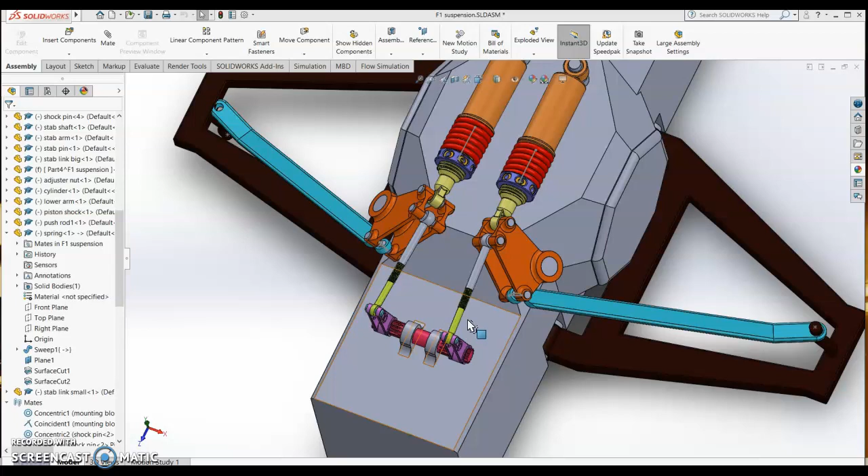On this video, we are going to review the design of the stabilizer link, the threaded link, this stabilizer link. So I open. Alright, so this is the finished product of the stabilizer link. It got a thread, and then of course it got a ball socket inside.

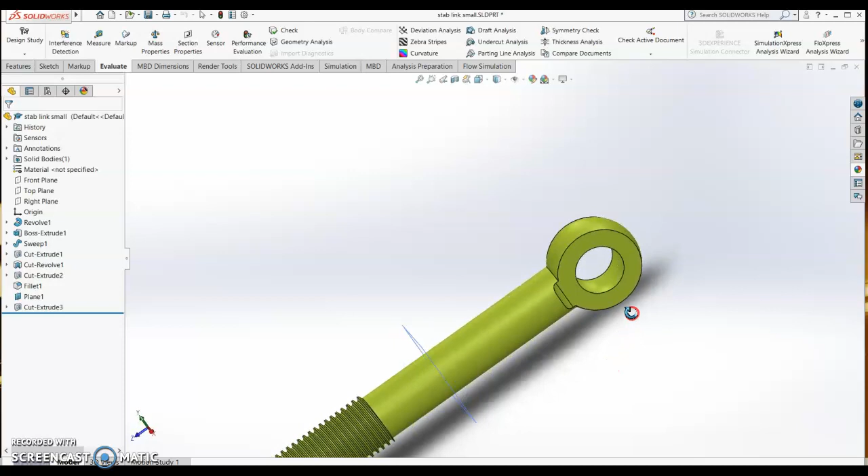Alright, so let's see the first sketch. So the first sketch is a ball, similar to the big stabilizer link. Edit sketch, normal to. So we drew a circle with a 15 mm diameter and then drew a line to make it half. So that is the sketch.

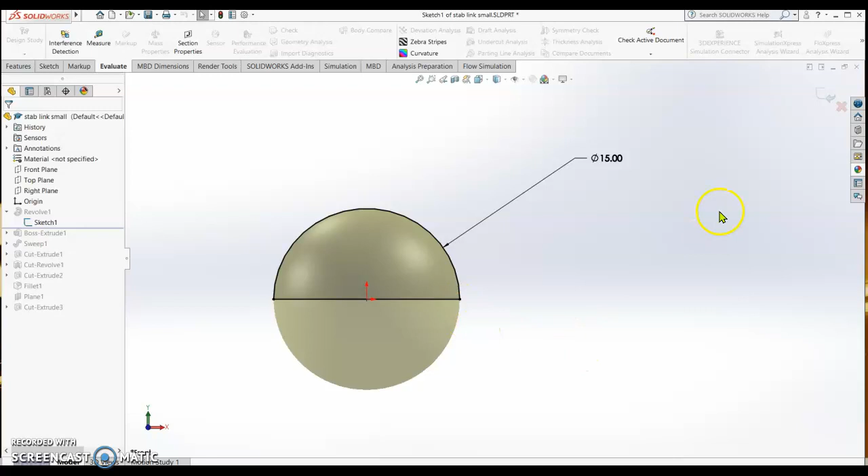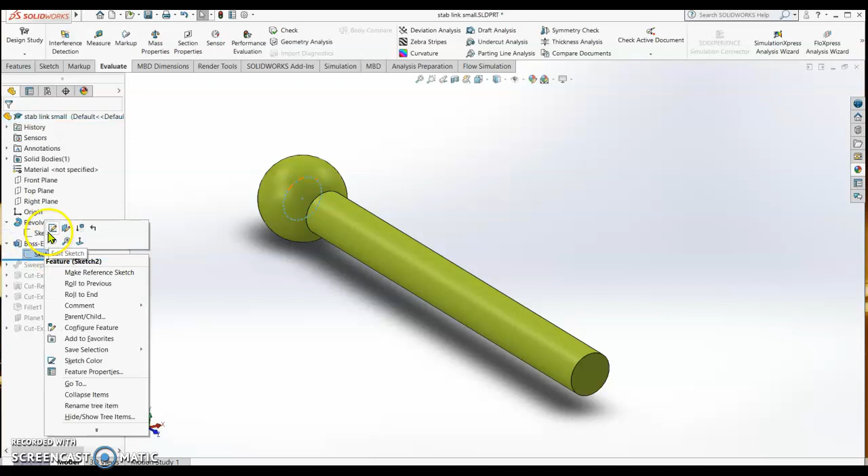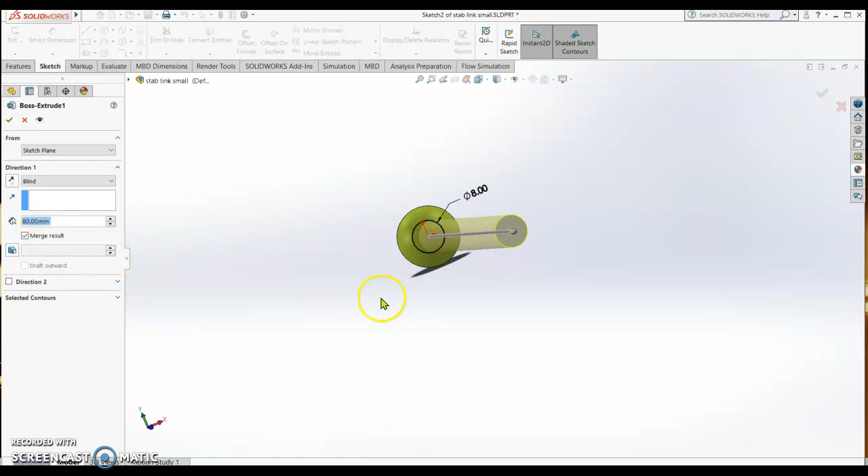We close the sketch, and then of course it is revolved, using this line as the axis of rotation. Then check, then extrude boss for the rod. The sketch is on the origin, on the front plane, center of origin, 8 mm diameter for the rod. It is extruded to 80 mm, so the length from the origin to this point is 80 mm.

After that, he makes a sweep feature, used in making the thread. So how is this design similar to the big stab link?

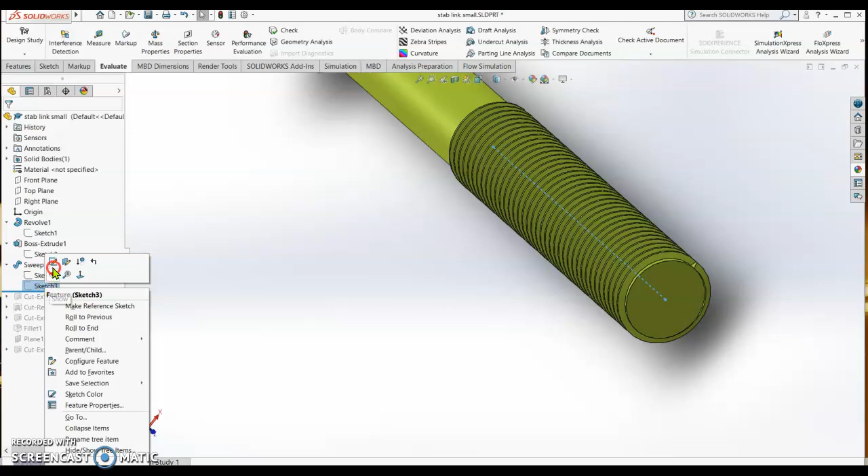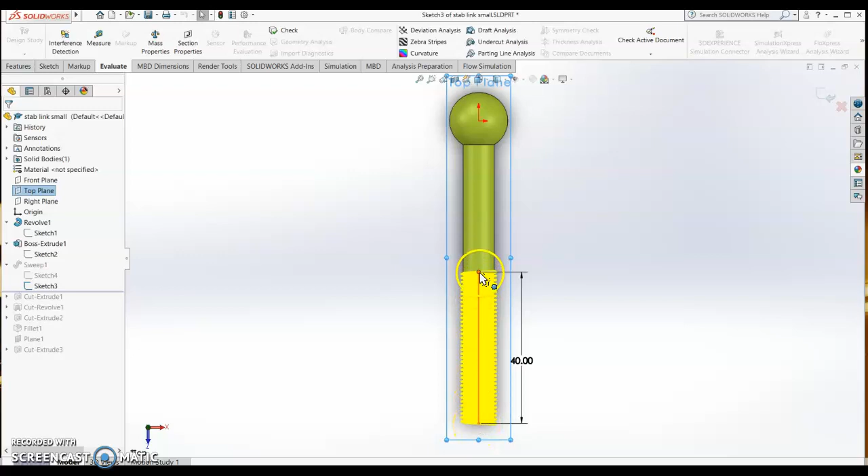Edit sketch. So the first sketch is a line on the top plane, normal to, so it's one line. The length is 40 mm from the edge of the shaft or rod going inside, 40 mm. Close the sketch.

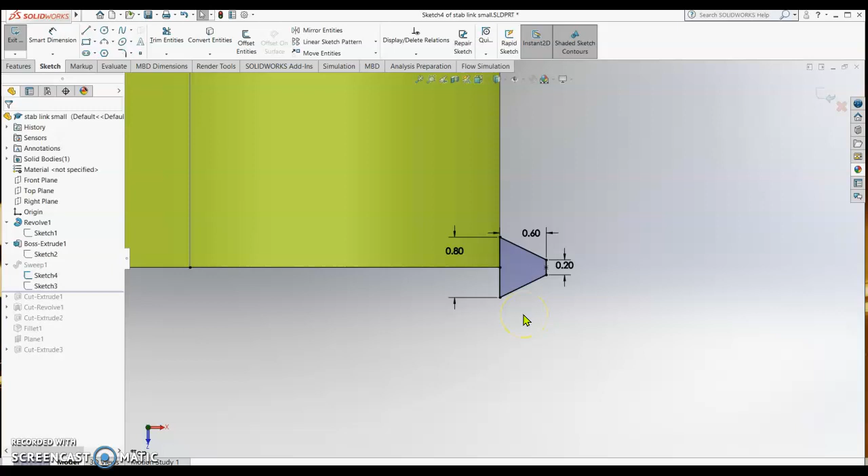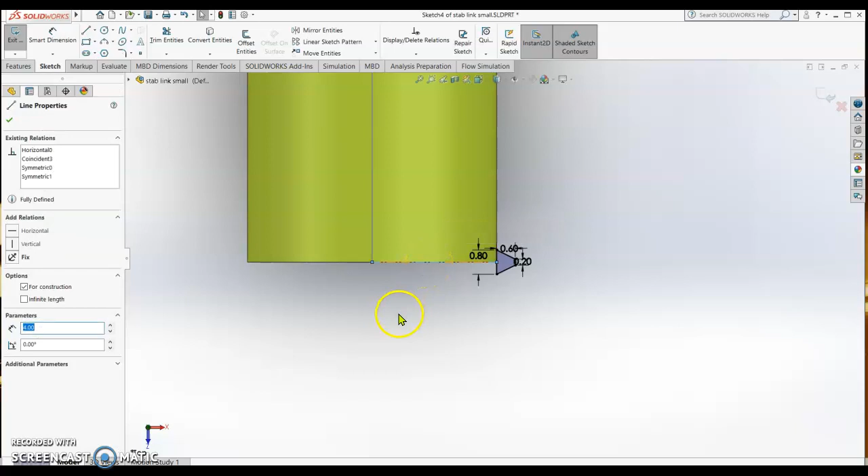After that you sketch the design of the thread. It's an external thread, similar to the internal thread of our bigger stabilizer link. The total width of the base of the triangle is 0.8, the tip is 0.2, the height is 0.6. But first we have a construction line here, exactly on the edge, that is very important. After that we close the sketch.

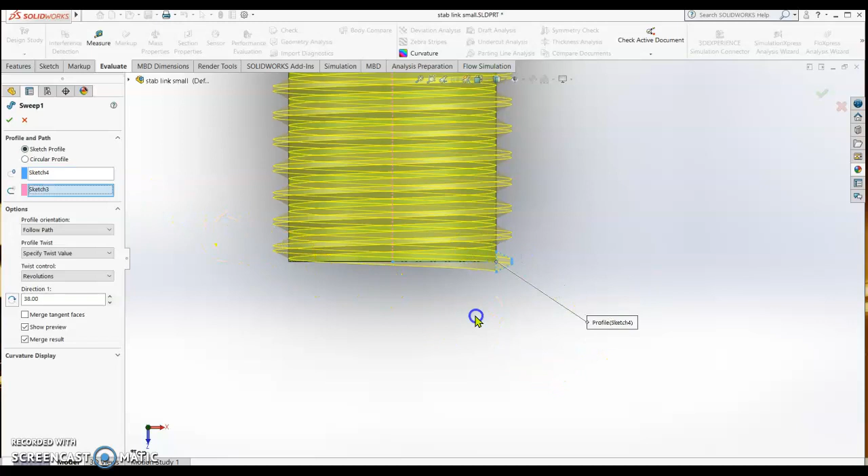Then sweep on the sweep features. Sketch 4 is the profile of the thread, and sketch 3 is the path, meaning the vertical line that we drew. So follow path, the profile orientation, and then we specify the twist value. We select revolution instead of degrees, and the number of revolutions is 38.

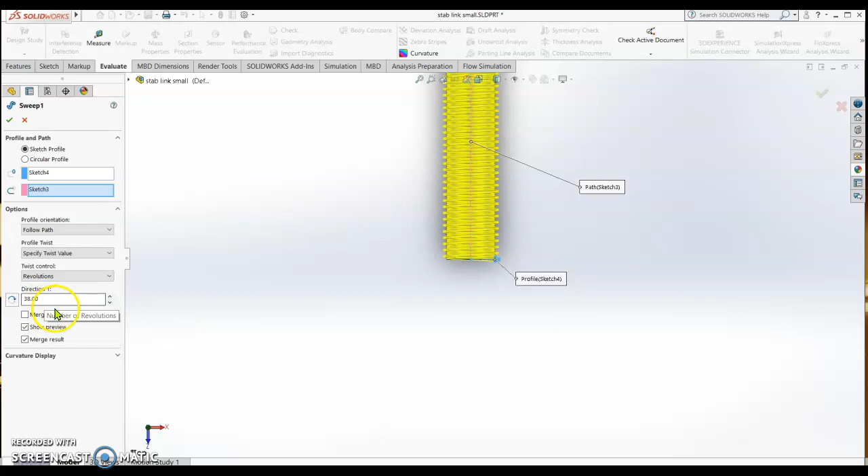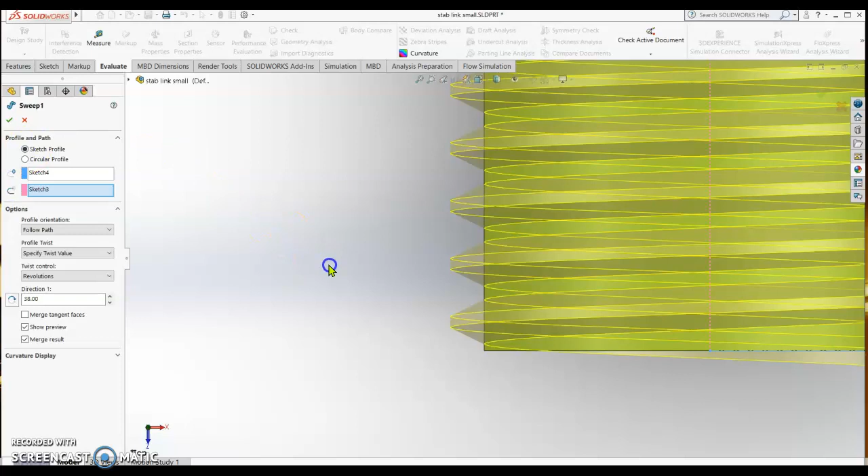You can see the inside depth of the thread is almost the same on the tip of the thread. If ever you want to reduce it to make it wider, you increase to make it smaller. Once you're done, check.

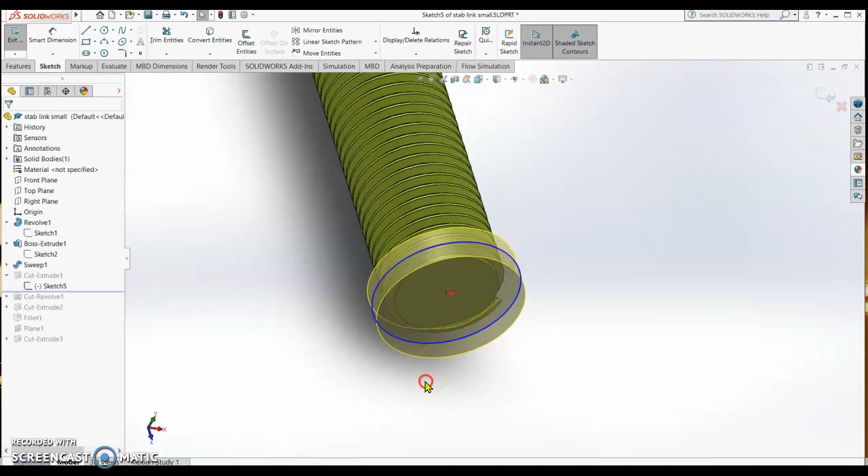So we are going to cut the excess. There is an excess over here, so we draw a sketch on the face of the rod. We draw a bigger circle than the thread, normal to. There is no dimension as long as it's bigger than the thread. The thread size goes until this circle, so this is our drawn circle, bigger than the thread size.

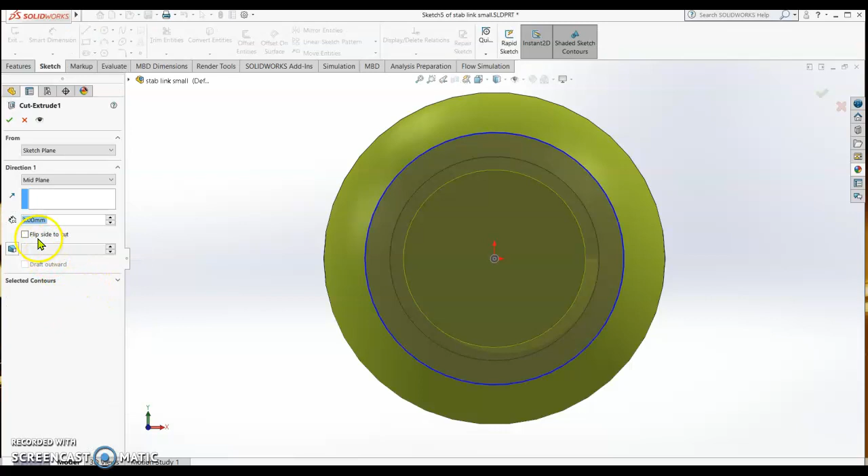Close. And then it is cut by a distance of 3 mm, meaning from the point of origin of the circle, it's cut 3 mm. So the finished product is like this. And then we have the revolve cut to cut on this area for the ball socket.

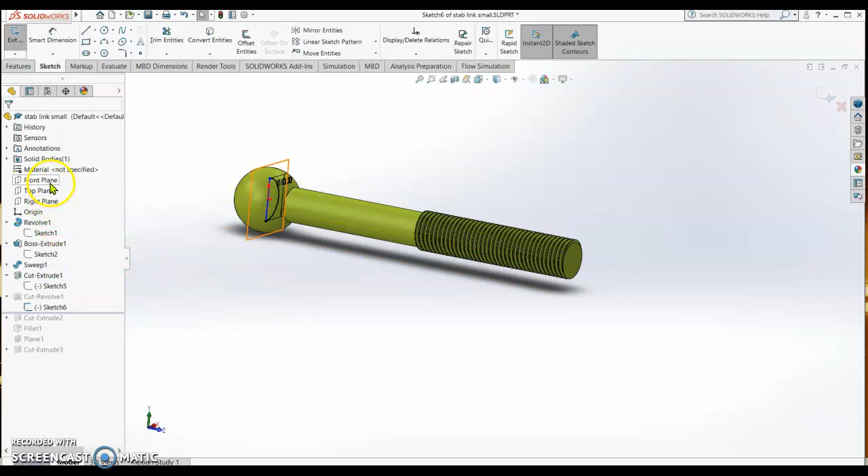What is the sketch? The sketch is like this. We use the front plane, and the original circle that we drew just now - the diameter of the circle is 10 mm. So we got 10 mm on the diameter of the circle.

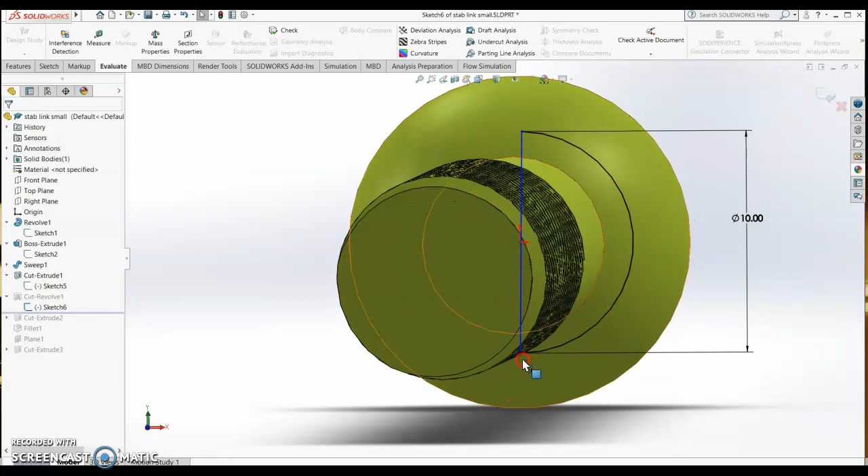We again make a line on the vertical and trim one side of the circle. After that, we revolve cut, using again the vertical line as the axis of revolution. It is cut inside already, and then we cut outside.

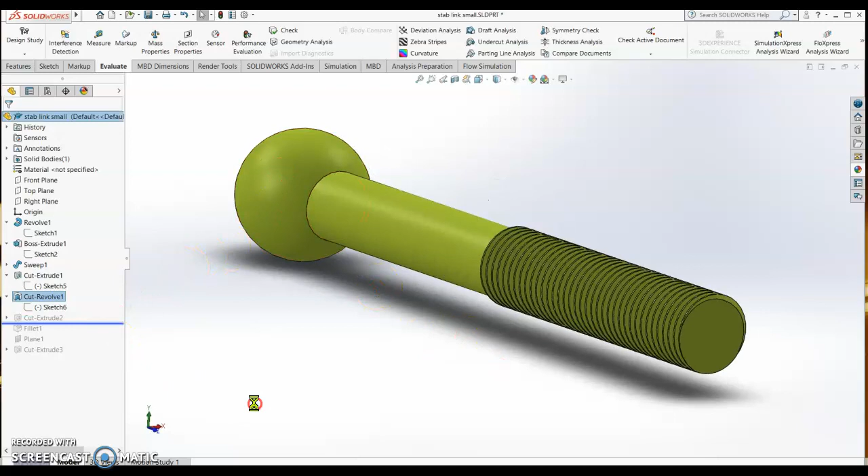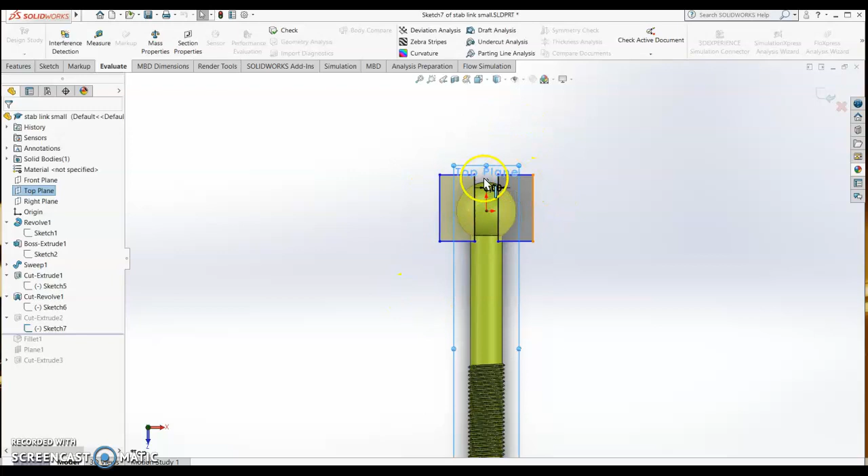How does this sketch on this cut work? Normal To. This sketch is on the top plane. We drew one circle and did the mirror. If you notice, there's one construction line here, that's the mirror. The mirror part is this side - I'll trim it to show you that it's really mirror. I remove the sketch, so this is the original sketch.

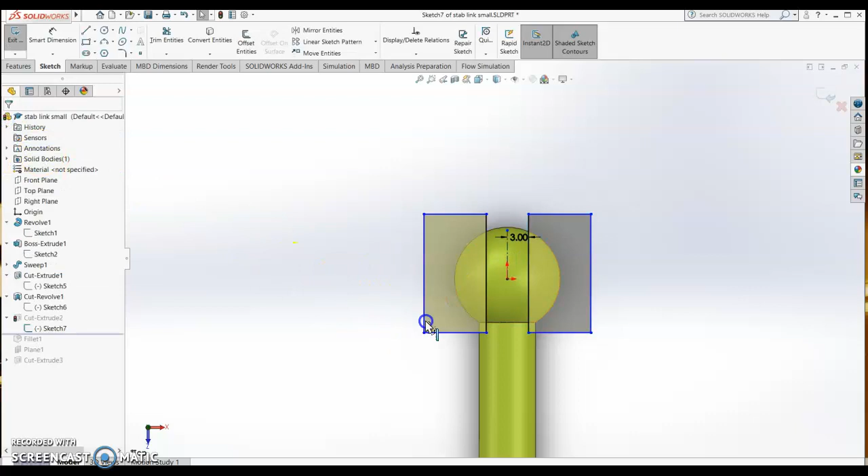You go to mirror entities, select this box, and then mirror about, selecting this line. Once you select that line, check, so the sketch will be here already. The distance, meaning the thickness of our stabilizer link ball socket, is 3 mm for the mid, so therefore it's a 6 mm thickness. We close, so it's already cut - once cut, it will reveal the ball socket inside.

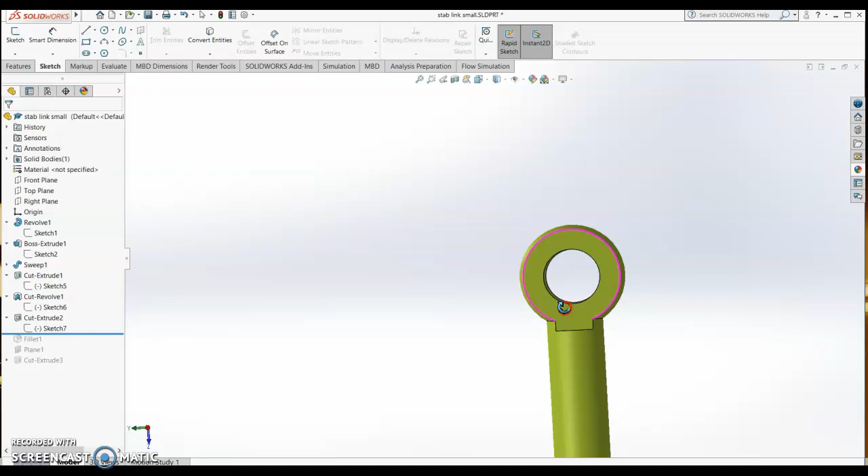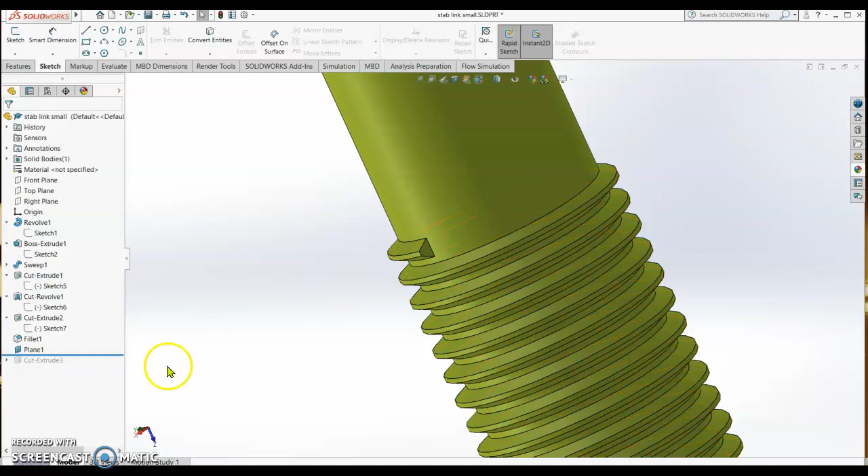After that we do some filleting - we fillet this side and this side, and then we insert the plane, because you want to cut the excess over here. If you notice, it's not nice - you see the thread, there's an excess thread there, so we cut it and it becomes like this.

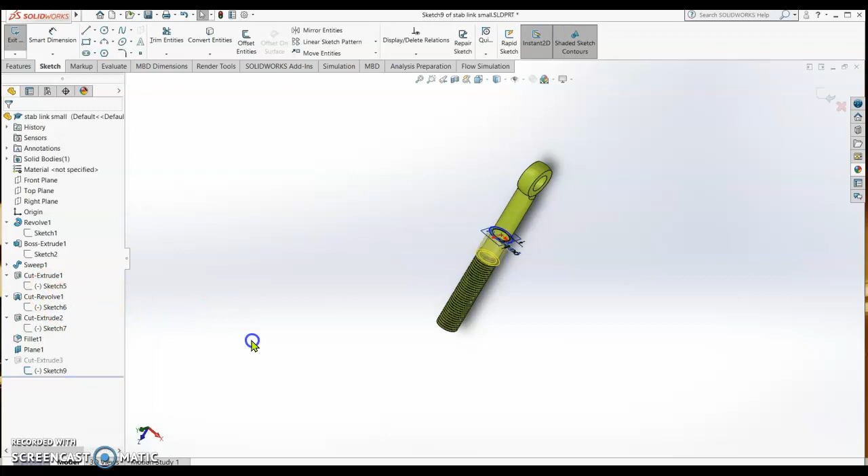So how is it cut? We insert the plane, on this one, on the front plane. After that the plane is inserted, we draw a circle. The circle should be bigger again - we have two circles. 8 mm is the smaller one, for the diameter of the rod, and the bigger one should be bigger than the diameter of the thread. To see whether it's really bigger than the thread - the thread goes until here, so this is our drawn circle. You don't need to put smart dimension because it's only used for cutting.

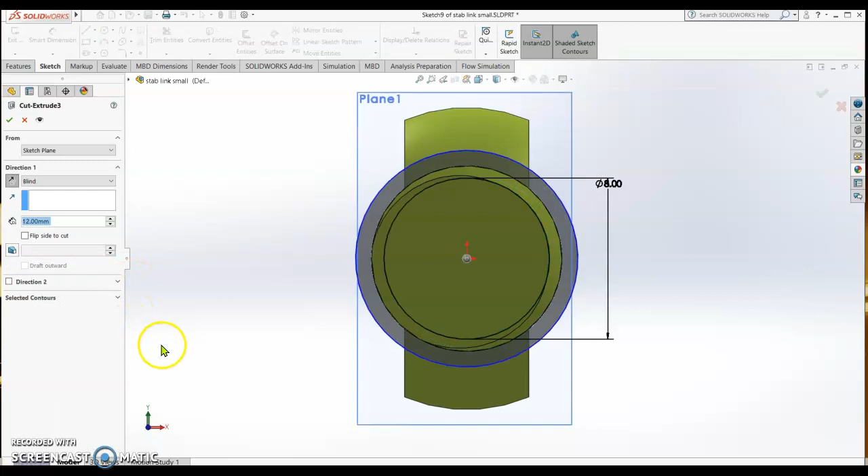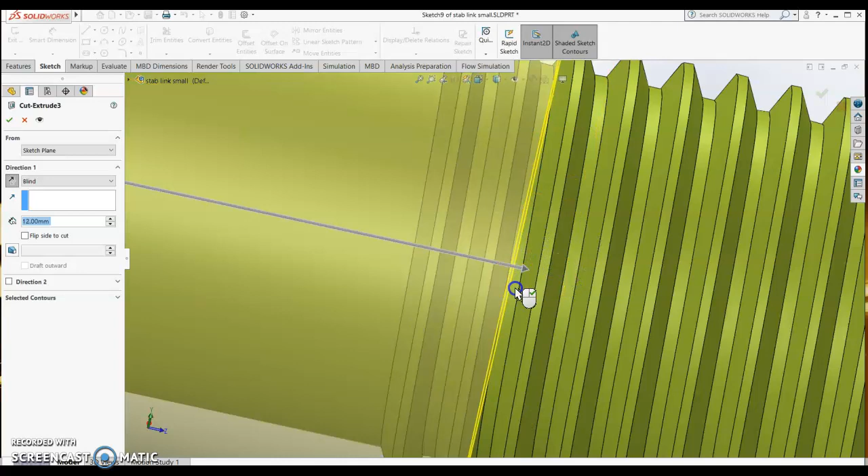So the cut, how deep is the cut? This is the cut - it depends, I cut 2 to 3 threads. You can reduce this one if you want, you can just move it, or increase it, or drag it. Up to you how much you want to cut, as long as the edge is okay, and then check.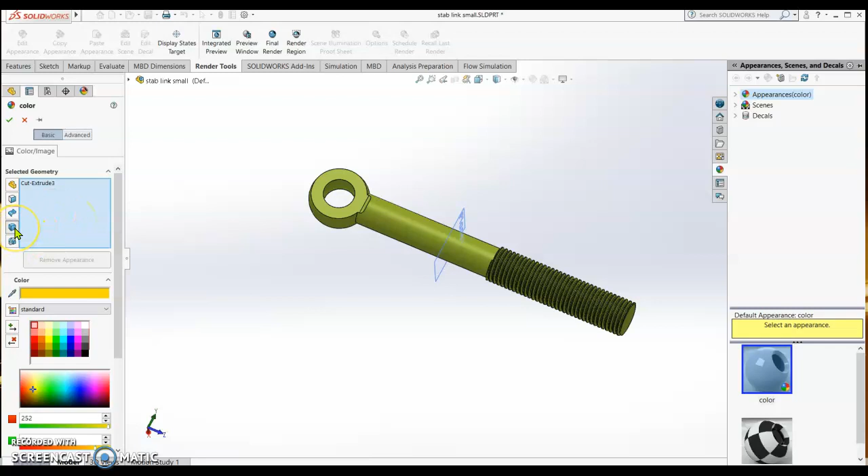So this is our stabilizer link. To color, you just select this one, and then select the color you want. But of course, not only the extrude cut, it should be the body - so you select this body and then select what color you want and check. So that's it on this stabilizer link.